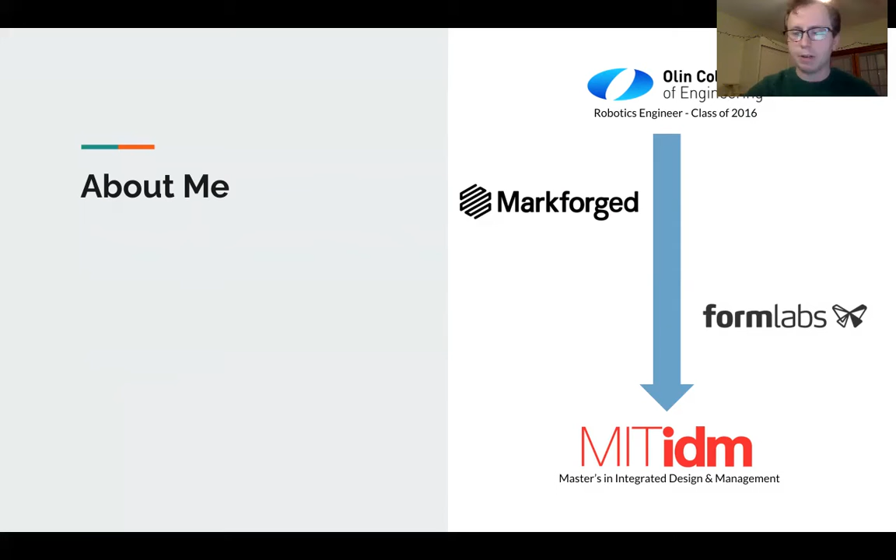A little about me: I graduated from Olin College of Engineering as a robotics engineer in 2016, and since then I've mostly been working in the 3D printing industry, first at Markforged, a company that creates high-strength metal and composite 3D printers, and now at Formlabs, which focuses on high-detail, high-precision 3D printers. I work with engineers and manufacturers all over the place to implement new 3D printing technologies into their workflows, teaching people how to design for 3D printing and what aspects will be most valuable to help their company prosper.

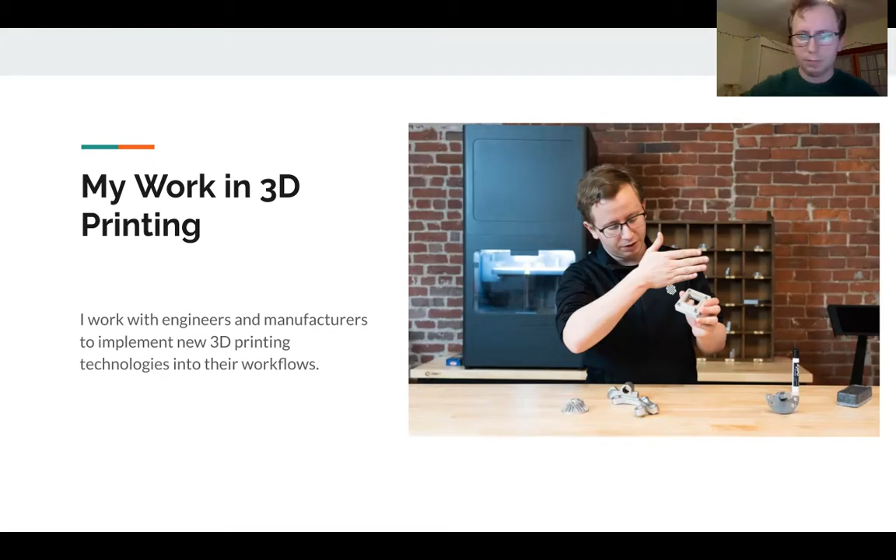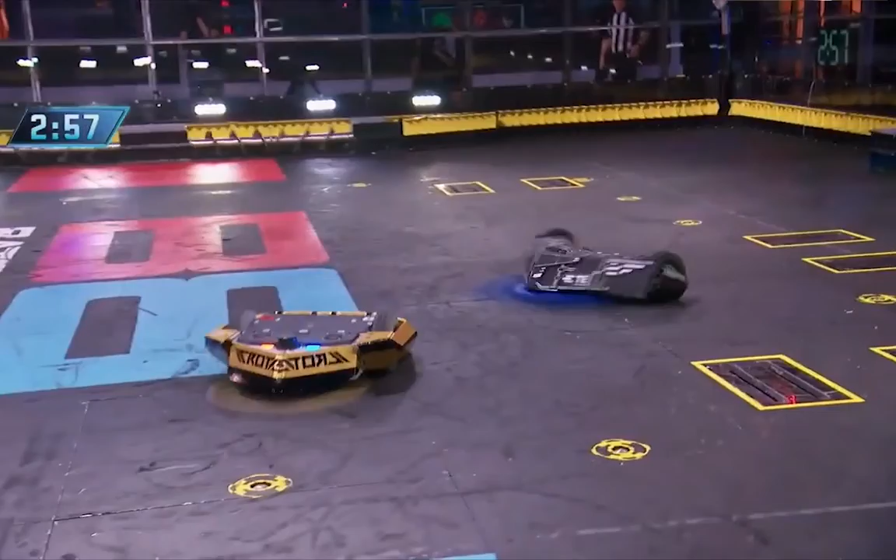Outside of work, I'm a mechanical engineer as part of Team Valkyrie on the Discovery Channel's BattleBots TV show. If you haven't heard of BattleBots, it's a really exciting TV show where basically teams of engineers build 250-pound robots to fight in a tournament-style competition.

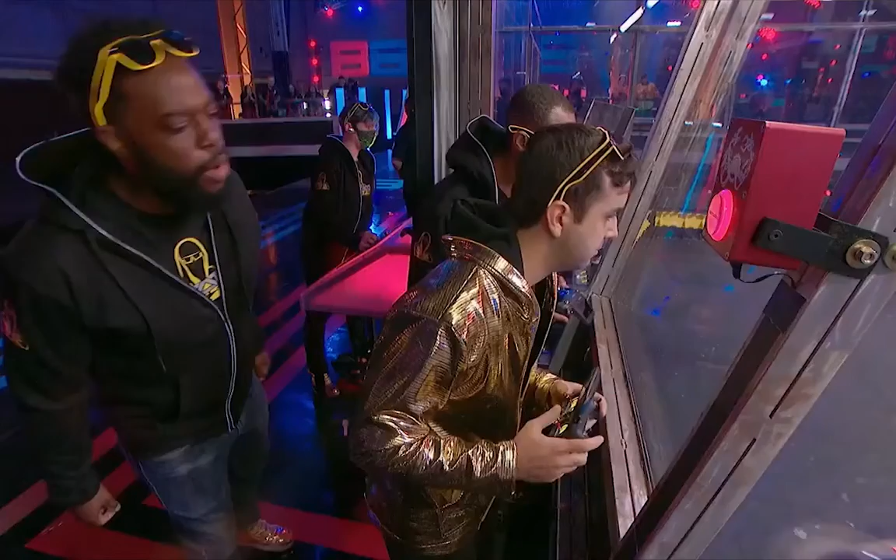So here's a little clip showing one of our fights. Our team, Team Valkyrie, has been competing on BattleBots for the last 3 seasons, and we've had some really amazing, incredible, destructive fights. This last season, we won the Most Destructive Robot Award, and we got all the way to the top 16 in the bracket.

It's been a really great way to put some of my engineering knowledge to the test and continuously learn, practice, and grow. So today, I'll be talking with all of you about how 3D printing has shaped the manufacturing industry, how I see manufacturing advancing with 3D printing, and at the end, I'll chat a little bit about my BattleBots experience and how robotics is a great way to practice and learn engineering and gain some amazing new experience.

Now, when I was in high school and college, 3D printing was really starting to take off. A lot more companies were making 3D printers, a lot more people were talking about it, and what really attracted me to the technology is that it's a fundamentally different way of making parts.

Some traditional processes include forming processes like injection molding or casting or even sheet metal bending, where you're molding raw material into a shape, often with raw molten material. Subtractive manufacturing covers things like machining, where you're cutting away material from a shape to make your final part. Both of these processes require a lot of tooling and setup, and usually large machines or large pieces of equipment to actually make them work and produce parts.

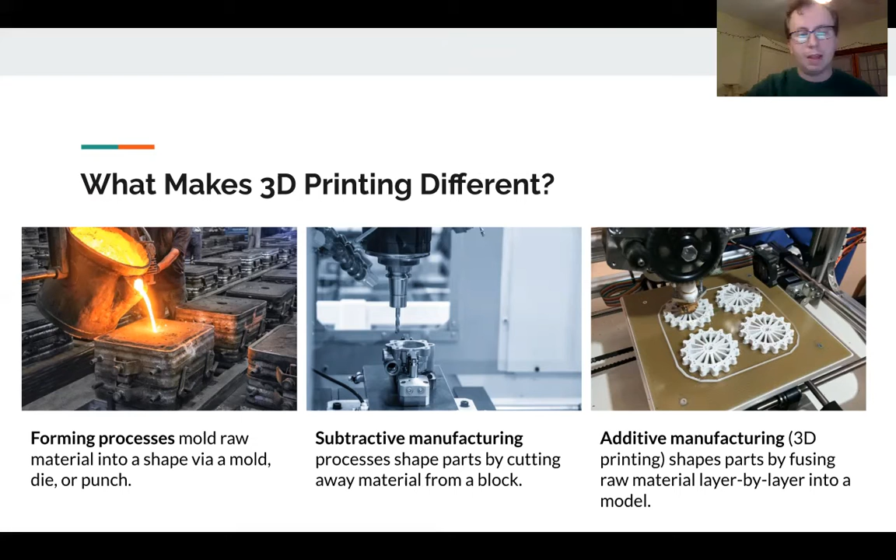But 3D printing shapes parts by fusing raw material layer by layer into a model. The entire technology ends up being more accessible and doesn't require a lot of the setup, tooling, and overhead that more traditional manufacturing processes have.

So compared to these traditional processes, 3D printing allows for so much design freedom at a far lower cost, and at the same time, it's a very accessible way to produce parts. You send the printer a file, it produces the part without any sort of tooling or hands-on setup that you need to do, and it does it very quickly. So the whole technology and process becomes really accessible, making it much easier for anyone to make any sort of part that they want.

3D printing has been around for a lot longer than many people realize, since the 1980s in fact, but it's really only started making an impact on the manufacturing industry in the last few years. That's because advances in the technology since then have made printers more affordable and easier to use, with new materials that are strong enough to match the ones companies are actually going to be using regularly day to day.

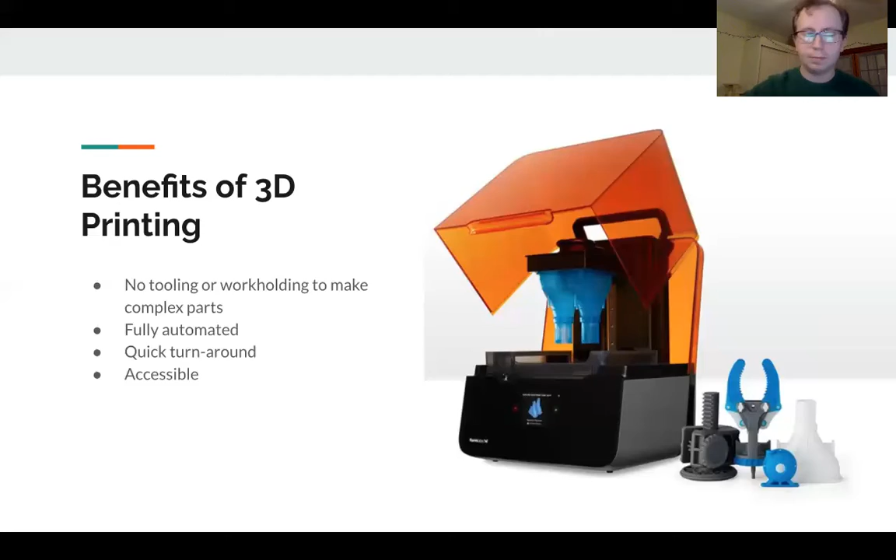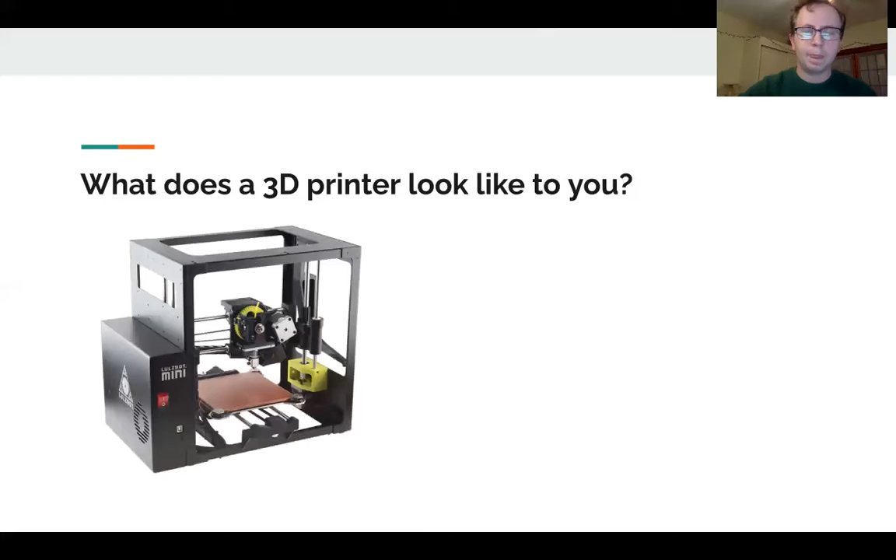In spaceflight, an extra pound of weight can mean thousands of dollars added, because one extra pound means more fuel you need and more support structures in the rocket. So investing in expensive 3D printing materials or printers ends up saving costs in the long run, since it saves money on fuel and on support and structure of spacecraft. So advanced 3D printers that can print parts like these end up being really valuable for these very high-end niche applications, and they actually save money in the long run.

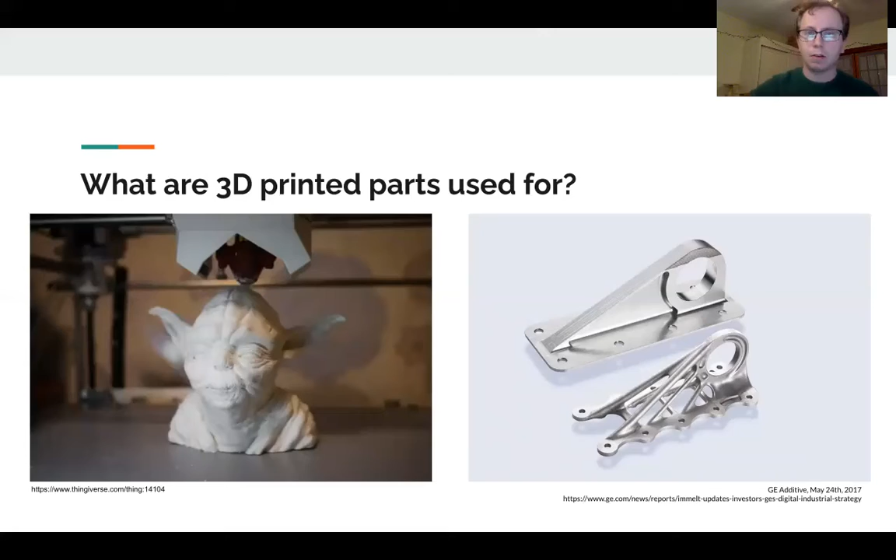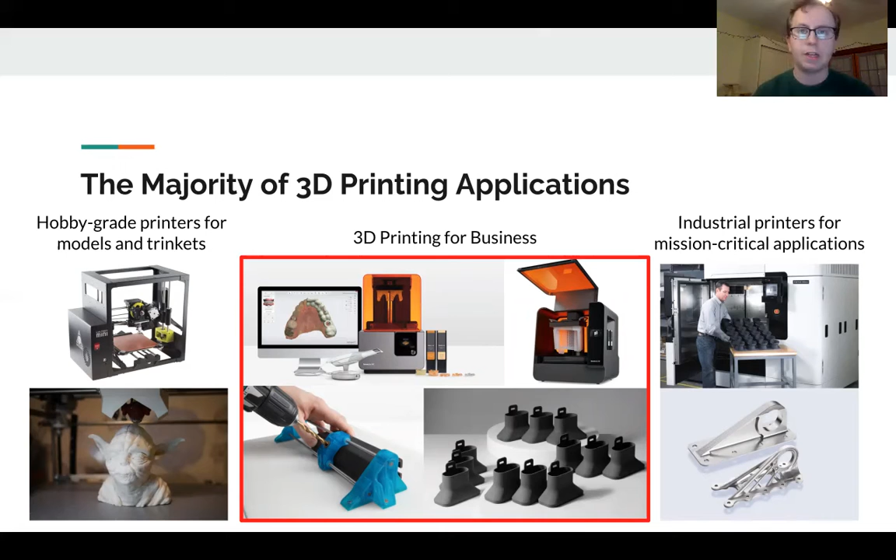But in general, we have these two extremes, and that's not how most businesses actually use 3D printers. While it's really exciting, it's not reflective of the majority of applications of 3D printing in the workplace. There's a huge range of 3D printers and applications used in engineering and manufacturing today that aren't really talked about. This is where you, as young people, can add a lot of value as you enter the workforce, helping businesses get their products to market faster.

So 3D printing is really valuable in three key ways for many businesses and companies that are making things.

In one regard, 3D printing is used for prototyping, where you can quickly design and iterate on models of a new product very quickly. 3D printing is also used a lot as tooling and fixturing—helping a manufacturing line get up to speed requires a lot of different tools, parts, jigs, and fixtures that, using traditional processes, take a long time to make. So 3D printing is really valuable for building out tooling and fixturing for manufacturing lines.

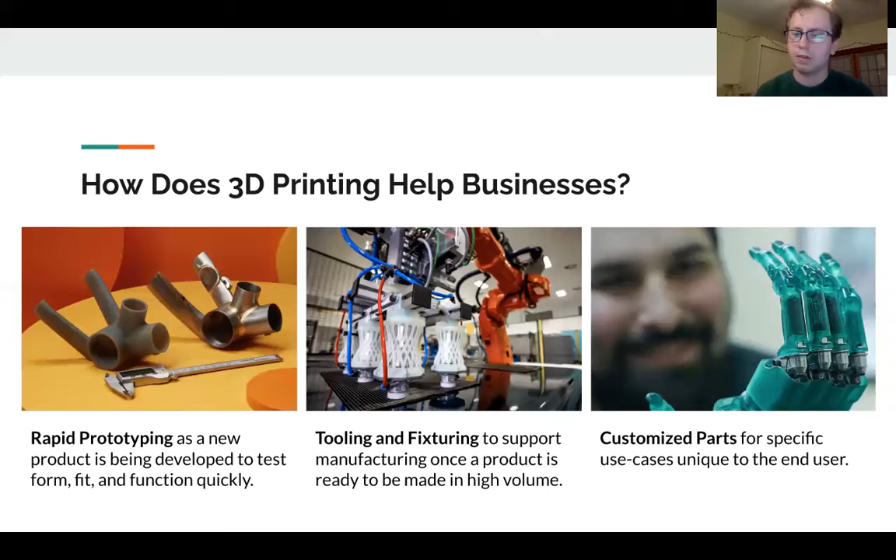The third area where 3D printing really helps businesses is in creating customized parts for specific use cases that might be unique to the end user. Things like prosthetics are a great example of 3D printing being used in companies and businesses to create customized products that you really wouldn't be able to make any other way.

Designing a new product can take a whole lot of work. This is the four-step design process I like to use. Step one is to identify the problem. Step two is to design that solution—whether that's the mechanical design, the software, or the electronics. Step three is to manufacture the design, actually taking your design and building it in the real world. And step four is testing.

Testing is always really important because that's when you get feedback. That's when you learn what worked and what didn't. You always want to apply what you've learned from testing back into your design cycle and iterate over multiple revisions so your design continuously improves.

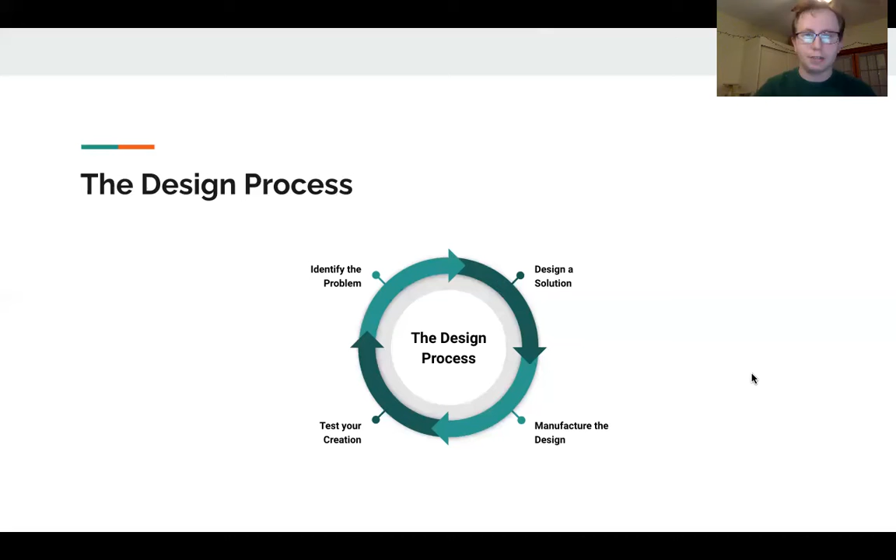This happens time and time again in product development, but the bottleneck is always going to be manufacturing, because usually when you send a design out to get machined, it can take 4 to 6 weeks. So you spend a lot of time waiting for parts to come in.

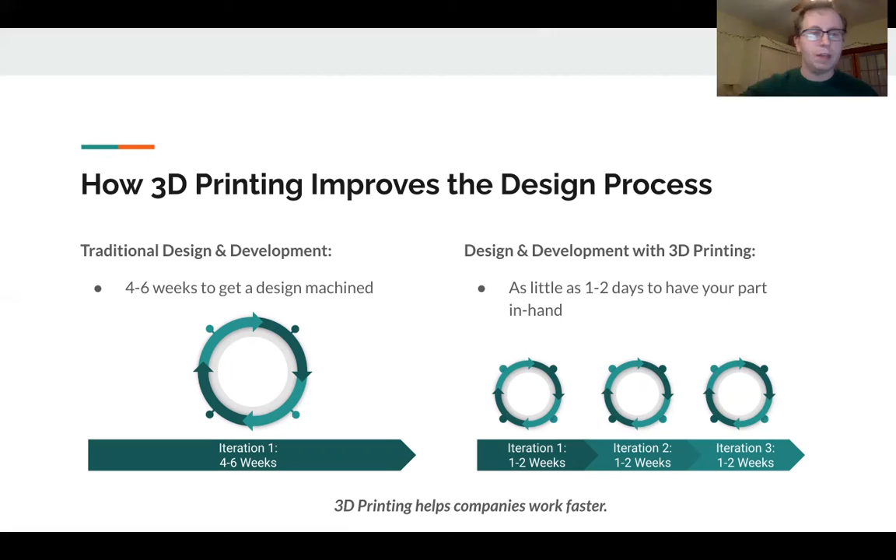That's why 3D printing is really important—instead of spending 4 to 6 weeks sending your design to a manufacturer, getting it back, assembling it, testing it, and feeding it into the next iteration, if you have a 3D printer on site you can have your parts in as little as 1 to 2 days, going through many more testing cycles in the same amount of time. So 3D printing really improves the design workflow, helping companies work faster, iterate more, and end up with higher quality, better designs because they can go through quick iteration cycles without waiting long periods for parts.

One of the reasons why that's possible now is because of advances in 3D printing materials. Modern 3D printing materials usually match the strength of the plastics and metals used in production settings, at a very affordable price point. So we can print in materials like nylon, ABS, polycarbonate, and many more.

Other materials might not be exactly one-to-one with production materials, but usually end up matching the properties. So 3D printing resins can be designed to match properties of materials like ABS or TPU, and some 3D printers can print parts as strong as metals with fiber reinforced plastics.

This basically allows you to not just test does a component fit the right way, does it look the right way, does it feel the right way in your hands if you're designing a product someone's going to interact with a lot, but also, is it going to perform the right way?

So there's a huge range of affordable 3D printers and 3D printing materials that allow businesses to actually test products or test their designs in the ways they'd be tested in the field, and make sure they're going to be strong enough before they send them out to get manufactured in larger quantities.

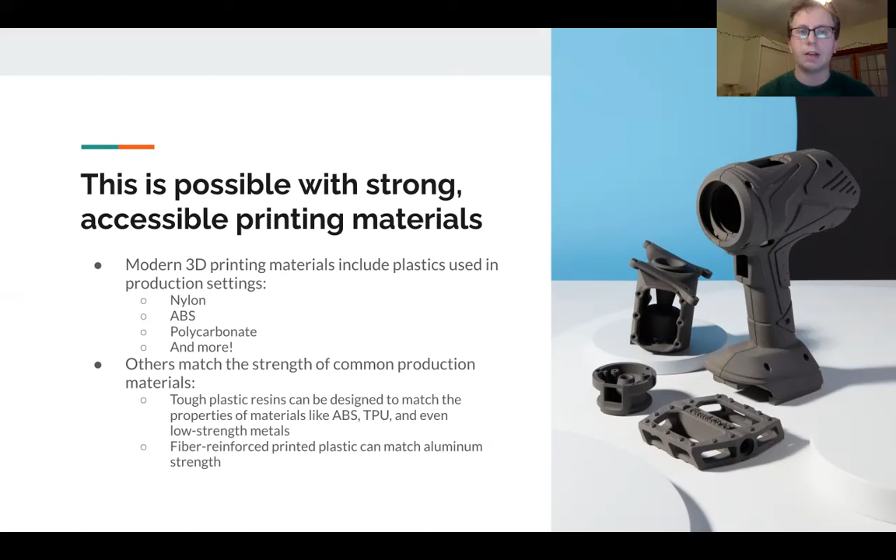And that's kind of the next step, ramping up manufacturing lines. While 3D printing hasn't gotten to the point yet where we can print tons and tons of parts per day to replace injection molding or very high volume processes, 3D printing is still going to be really valuable in other ways, because of the quick turnaround and the material strength.

If you're working for an engineering company designing a product, after you've gotten through the prototyping phase, you usually end up with a product you're satisfied with and ready to take to production. But that's a really big hurdle, because you need to go from making one or two of them to thousands, to hundreds of thousands of these pieces of equipment per year.

So once you have a product you're ready to sell, you need to figure out how to make it in large quantities. This involves building a lot of tools and investing in a lot of equipment to make the process as efficient as possible.

One example is injection molding. You can see here, this is actually an injection mold for Lego bricks - this is how they make Lego bricks. What happens is they put these injection molds into an injection molding machine, seen below here, and they inject these molds with plastic to form the Lego bricks themselves.

They basically can do this in 30-second to a minute cycles, and the machines just repeat and repeat, and can crank out millions and millions of Lego bricks per month and per year. So designing each one of these tools, depending upon your product, is going to take time, and it's going to take more iteration cycles.

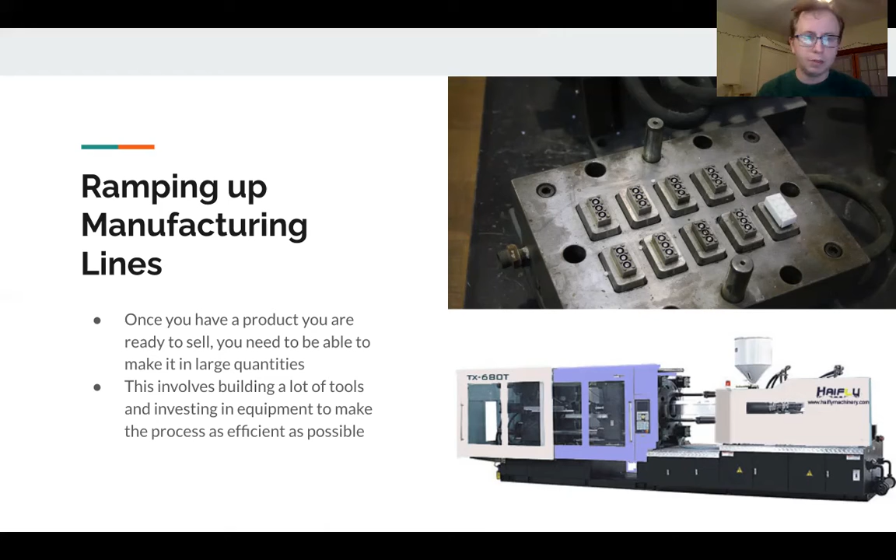But all of this takes a lot of work and infrastructure build out to make happen, because every single piece needs to be manufactured. Every single part that's going to be put somewhere else needs some sort of custom robotic arm or gripper that will help align it and place it on the car. Every single piece needs to be inspected. So there's all these parts of the process that take time and design work.

Each piece of tooling needs to be designed. That can include things like injection molds, bending dies if you're bending sheets of metal, soft jaws for holding parts in a milling machine if a part is being machined, welding fixtures for holding parts in a specific way as you're welding it together, inspection tools to make sure your parts are within design specifications, assembly tools to help everything go together, and packaging tools.

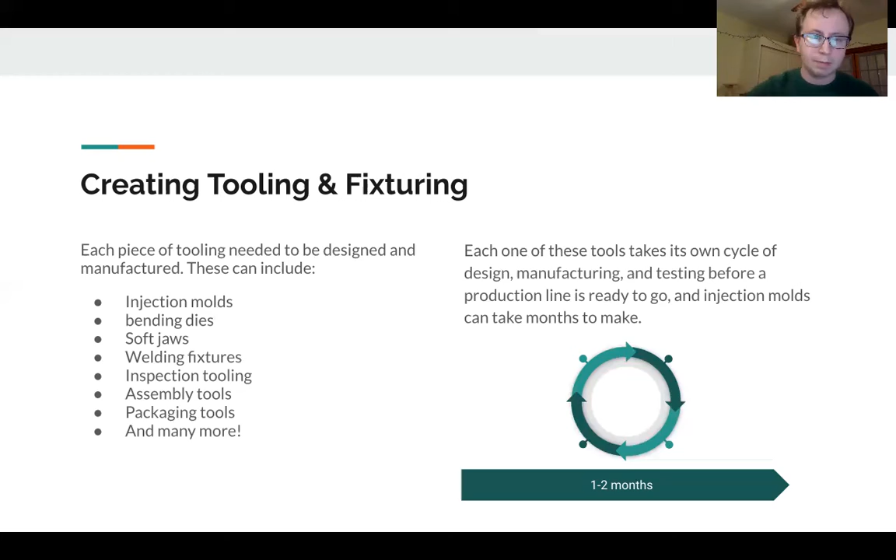So here's a couple of examples of where 3D printing can help. In a lot of these applications, 3D printing is a great fit because it's really adaptable. You can evolve your designs very quickly, and there's this whole range of material properties you have access to. For example, there's some materials that I work with today that can print and hold up as injection mold.

So here's an example right here of an injection mold making a part. This was actually one of those ear saver strips for wearing face masks, and they were able to print this out, put it on an injection mold, and run it just like they would an injection mold with a steel mold. Another really great example of 3D printing on manufacturing lines is with industrial robotic arms.

So if you have an arm like this that is handling some part of your design and moving it to a different stage of the process, then you can print out things like the grippers, the end effectors that actually grab the part that's being picked up, and those end up being really lightweight, really cheap and easy to make with a 3D printer, and they end up holding up for a really long time.

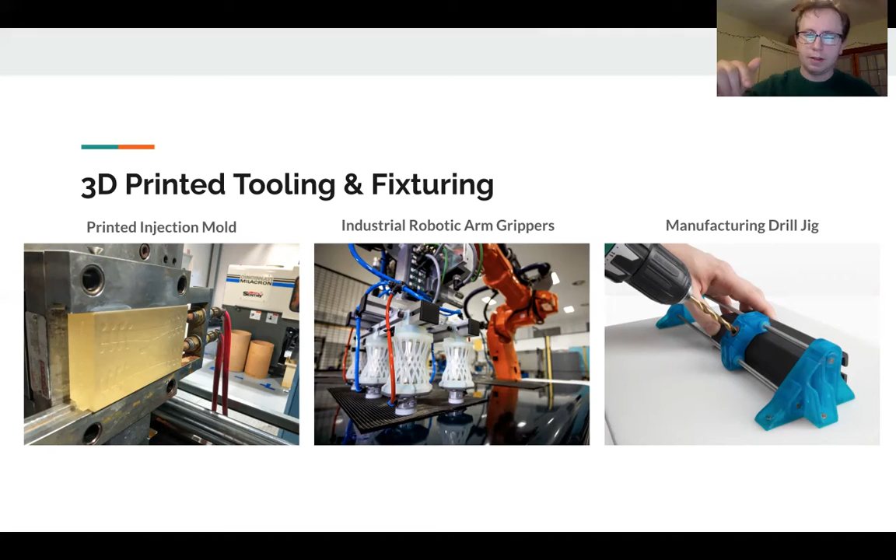Another example is a drill jig. If you have a complicated hole pattern in a part, you can 3D print a drill jig that has those hole patterns, so you can use a drill and align it very easily with each of the holes you need to drill out.

So there's lots and lots of examples of these, and on the right over here we have 3D printed vacuum forming molds. If you're familiar with plastic packaging for a lot of different products, a lot of the molds for that packaging have to be machined, and they often take a lot of time to make. You can 3D print those and just put them on the vacuum former just like you would a machine mold, and they end up being a lot more cost effective and working just as well.

Up here's another assembly fixture. This printed piece actually sits on a conveyor belt that runs along basically a manufacturing line, and different parts get placed on it. So it's kind of an assembly fixture, and they need lots and lots of these because they're producing lots of parts. So all of these little bits of the process end up taking time.

And if you're working with traditional manufacturing methods like machining and other forming processes, this can take a good 2 or 3 years to get a full production line for a complicated product up and running smoothly. So if you're applying 3D printing in all of these key places where you need custom parts that might take a long time to get back and install on your manufacturing line, 3D printing can actually reduce the time it takes that manufacturing line to get up to speed by 50% or more.

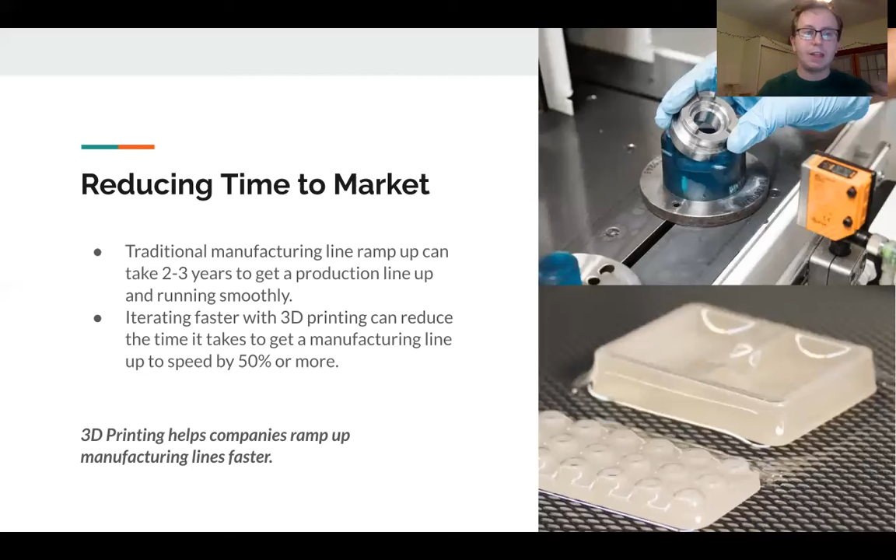So this is really important because it means that applying 3D printing in all these different ways—printing tooling, printing end effectors, printing different parts that can support a manufacturing line—even if you're not printing the final parts themselves, it helps companies get up to speed really quickly and get their products shipped out the door really fast. It really shortens the amount of time it takes manufacturers to make their products and to make them in high enough volumes that they can start selling them.

So the last space I want to talk about in terms of 3D printing and manufacturing is customized parts. Without the need for expensive tooling or machining processes, it's become really affordable to produce custom parts that are designed specifically for one person. A really valuable example of this is in prosthetics and orthotics, where every person might have a different need.

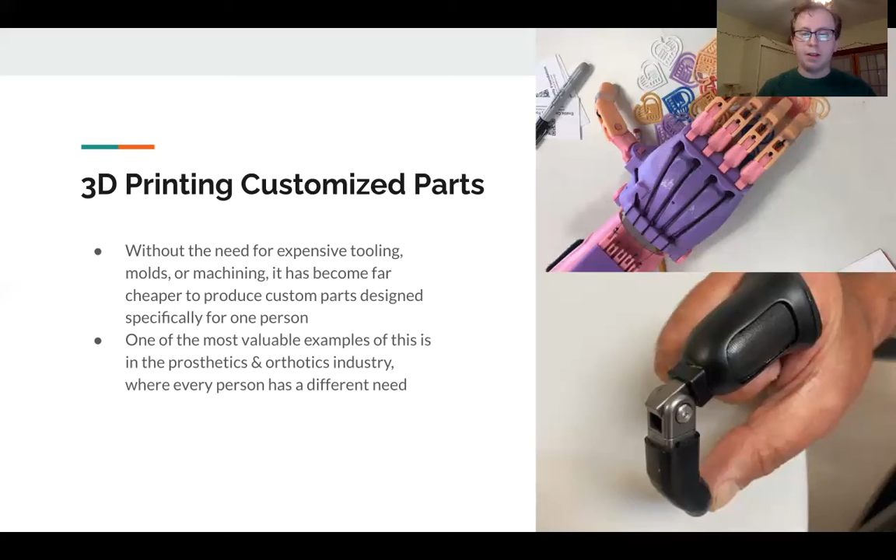Designing a custom socket, for example, here on the right, we have a custom socket that is designed to fit specifically around this person's finger. This can apply to things like hands, prosthetic limbs, prosthetic knees. Building these custom solutions means a lot because each person's unique need is addressed and allows them to do what they want to do and have the assistance that they need, without having to compromise on standardized parts that might have been mass manufactured.

And that idea of customized products for individuals is really where 3D printing is headed in the next few years. Printers are becoming faster and more automated, so making custom parts in large volumes is becoming more affordable.

One great example of this, at Formlabs, we've partnered with a company that creates custom earbuds. You can get a 3D scan of your ear, then they print out the model of the inside of your ear, basically a mold for a custom earbud. They use those prints as positive molds to create custom earbuds that are fit for your ear. These types of things really change the way consumer products are designed.

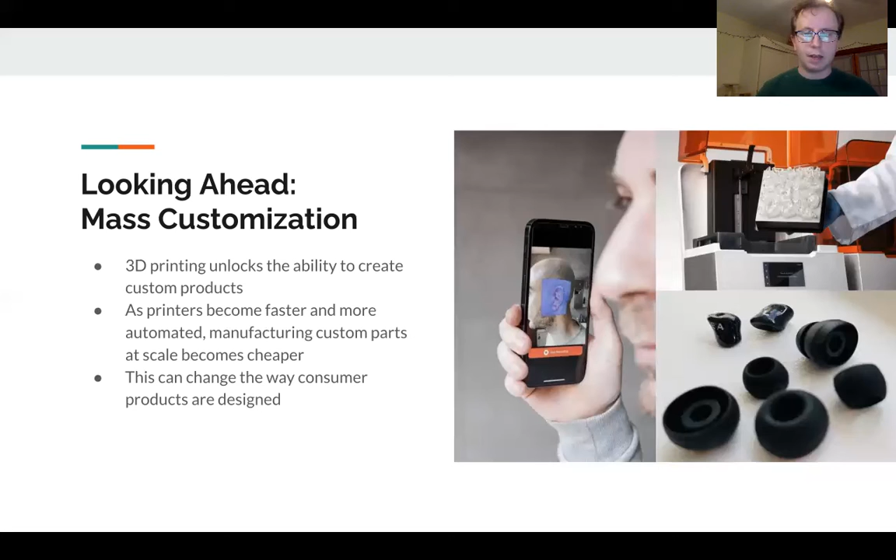Instead of having generic, mass-produced products that are kind of a compromise and don't work quite for everyone, you can have unique custom products designed specifically for you, and make them in large quantities. One of the ways that's applied today is actually in dentistry.

You or a friend of yours might have had these clear aligners or retainers. The way they actually make those is they take a 3D scan of your mouth to get a scan of your teeth. They 3D print that scan, and then vacuum form a sheet of plastic over the printed scan. That's how they end up making things like aligners and retainers. Every single one has to be customized to each single patient, because that's the nature of the product.

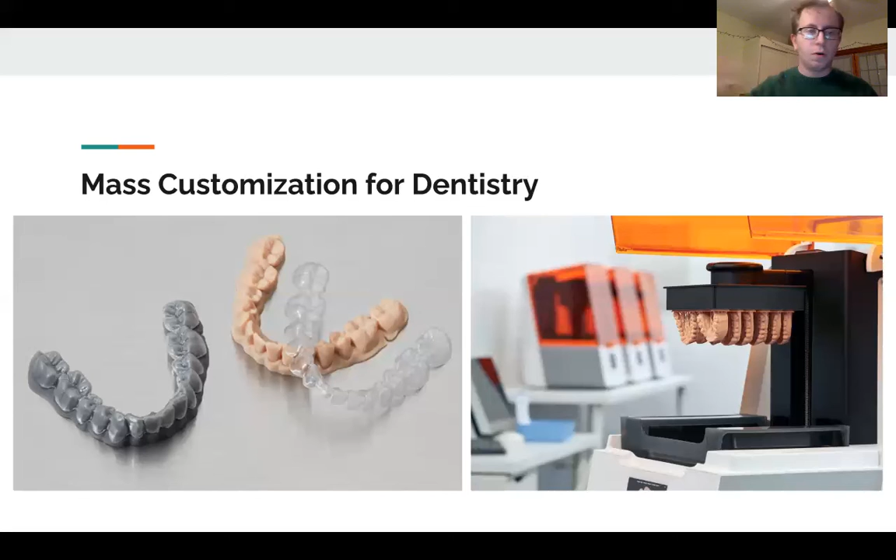So there are examples of mass customization like this that exist today, and I'm expecting to see those kinds of things scale as 3D printing becomes more utilized in manufacturing and product design. In general, those are the three big ways 3D printing impacts manufacturing: it helps companies iterate more to create better products more quickly, it enables efficient manufacturing ramp up so it brings products to market faster, and it allows for unique customized solutions tailored to the needs of specific customers.

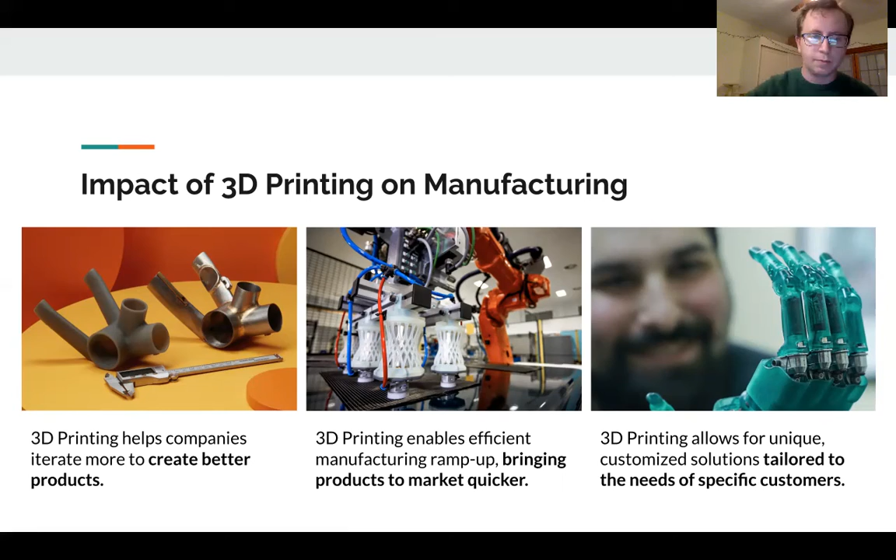One of the cool ways I actually use 3D printing personally is on BattleBots, in Valkyrie, the robot that I work on. We have over 40 3D printed parts on Valkyrie. About 10 of them are metal 3D printed, the rest are printed in high strength plastics.

We actually print over 300 parts total during each build season when we're preparing for a new season of BattleBots. A lot of those 300 parts are prototypes, a lot of them are tooling and fixturing. This is actually a drill jig that we printed. Since we needed a kind of odd angled hole in one of our parts, we printed a drill jig so we could drill that hole out.

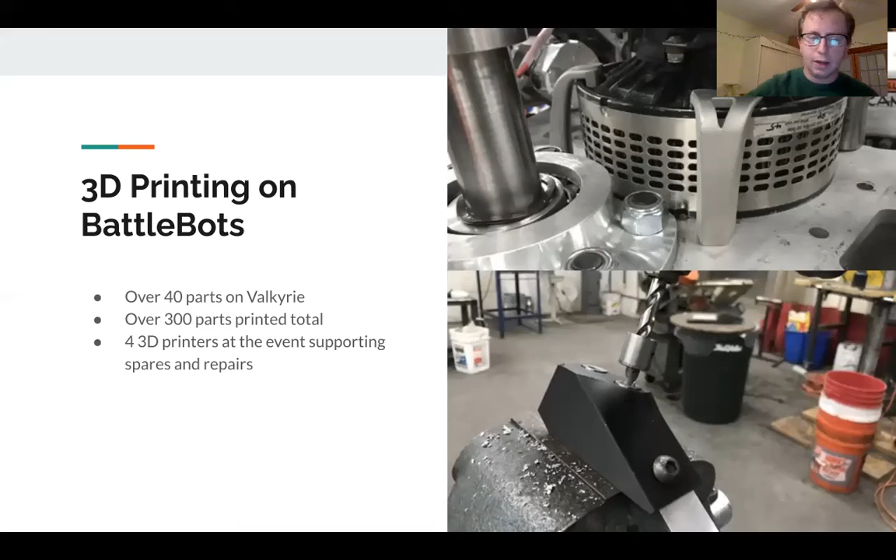And we actually brought printers to the event. We bring printers every year to support teams with spares and repairs. I was talking about the design process before - I apply that even in BattleBots.

One of the issues we had during one of our fights: we have one of our drive motors right here, and we discovered that when we would hit another robot really hard, our base plate would actually come up and bump the bottom of this motor, and that would dislodge the brushes of the motor and render the motor useless. So what we did is we actually 3D printed this little brace on site, and stuck it under the motor to support it and prevent the base plate from bumping up against the motor again.

This is a really great example because it really shows the design process at work. Every single fight, whether we win or lose, we learn something. There are all these little kinks in the robot that we're always learning about, always trying to work out and improve every single year. And with 3D printing, we can do that on site.

If we didn't have these printers on site, we would have had to figure out how to get this machined, or we would have had to involve this in the next iteration of the robot for the next season. But there are a lot of little ways like this where even a simple part was really quick to make, to install on the robot, and it ended up working for the remainder of the season.

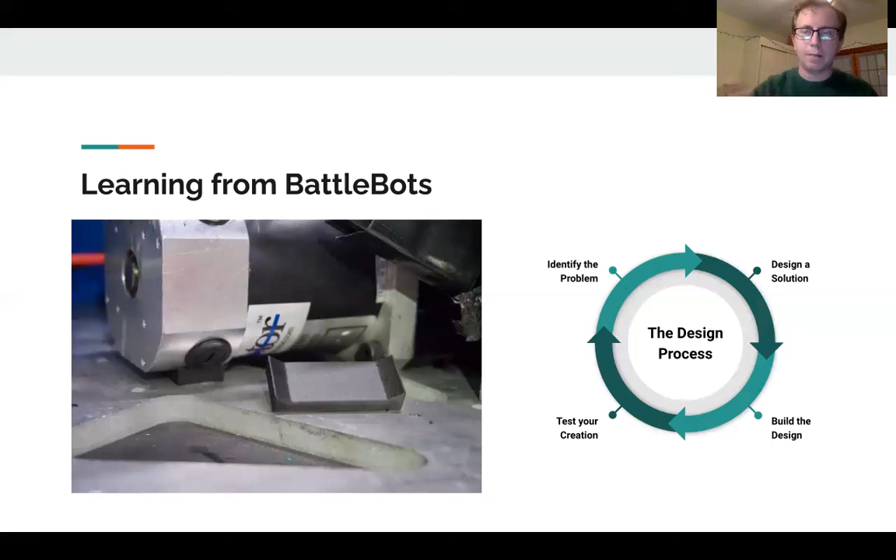This is what I love about the design process and about robotics in general: there's always ways that you can learn every time you have a system. You design it, build it, test it, learn something, and apply that to making it better and better year over year. That's really the value of hands-on experience.

It provides this exposure to real-world testing methodologies. Every time you go through this process, whatever you're building, you learn something, you build on your experience, and you can apply that to anything else you're building next.

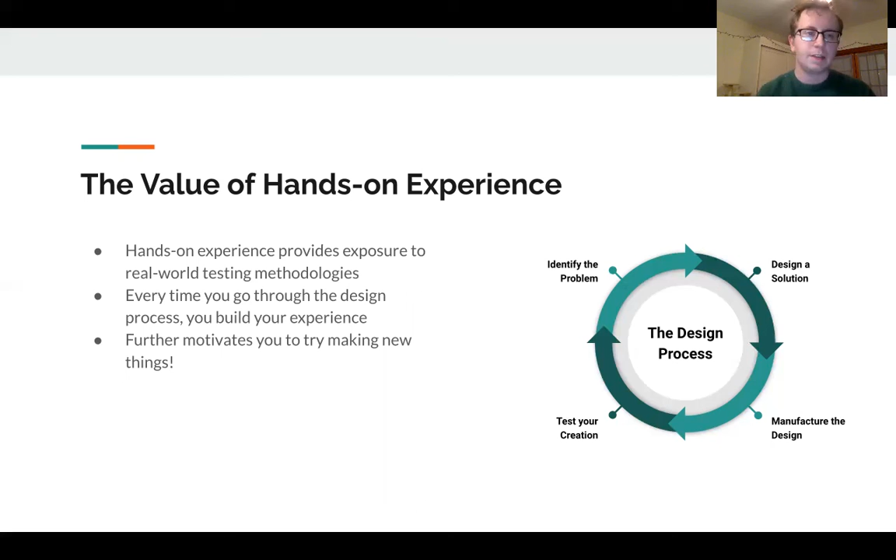It further motivates me to try new things, because every time I go through this design process of identifying a problem, designing a solution, manufacturing a design, and then testing it out, it's always exciting and very rewarding because I can see myself getting better and designing more complicated things every time.

That's also why I love robotics. It's this really nice intersection of hardware, electronics, and programming. There's all these different ways where it's really interesting to get involved, and there's really interesting challenges.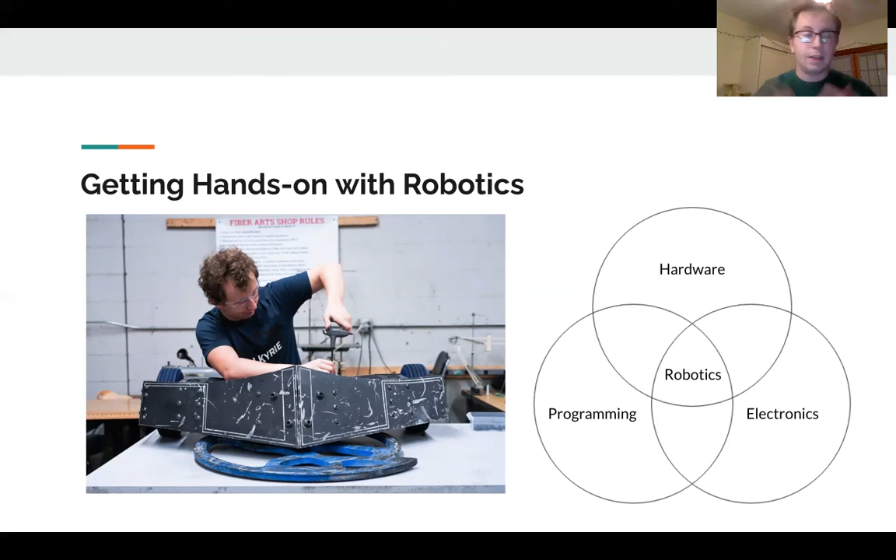Being able to design and make robotic systems is one of the reasons why I studied robotics engineering in the first place, because of that intersection where you're working across different disciplines, learning in each of these ways to build better systems and make them work more reliably every time you build them.

Robotics is also a really great way to get into engineering and get hands-on. There are small robot fighting competitions all over the country, and they're a great way to start learning, if you're looking for a project or a way to try designing and making something for the first time.

There are all these small robot fighting events with weight classes ranging from 1 pound to 30 pound. They're all really fun to go to, even just to watch. And whenever you're ready to start building your own robot, it's really great fun.

Every time I build smaller robots in addition to Valkyrie and fight in these competitions, it's always a really enjoyable experience, because every time I compete I end up learning something or testing out a different strategy, using that to develop my manufacturing knowledge and my engineering and design skill set, to improve and iterate and come back better next time.

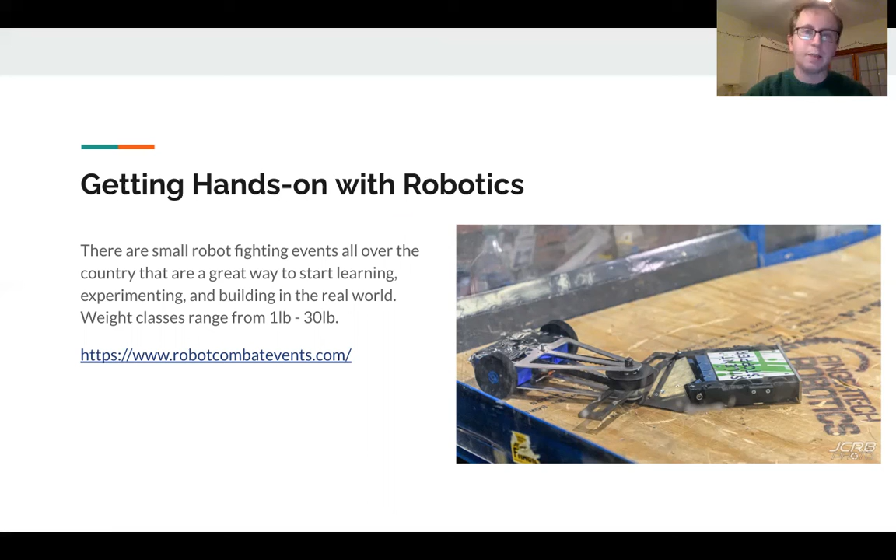So it's a really great experience, win or lose, because you always end up learning something, and the community is always helping you build your robots better.

One of the specific ways you can do that is through the National Robotics League, a league partnered with NTMA, meant for students, for young people like you, where you can work with your classmates and friends to get hands-on design, engineering, and fabrication experience.

They have 15-pound robot fighting tournaments where you can come with a designed and built robot as part of a school club or team and compete. You can check out gonrl.org for more information. Again, it's a really great way to learn, to get started, getting your hands dirty and trying things out.

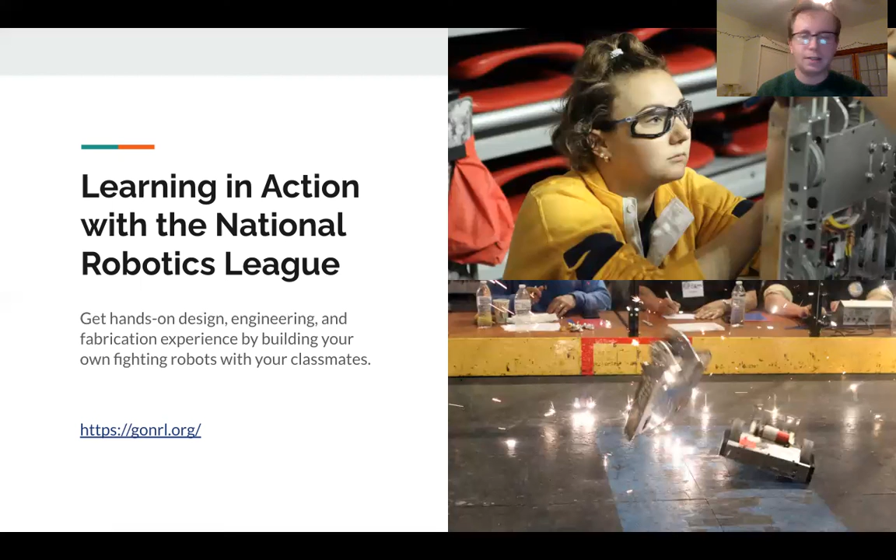That's what I love about robotics, and that's what I love about trying to design new things: the whole learning cycle of trying something, seeing what breaks, figuring out how to fix it, and using that to improve your next design, your next year, your next competition. That's really what makes these events special, because there's always room for learning.